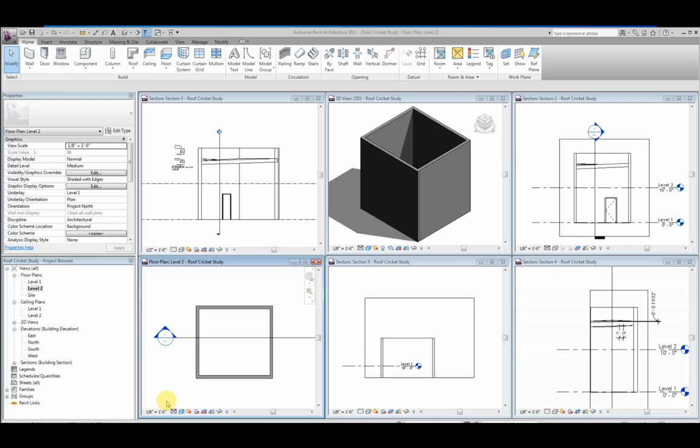This is a Revit 2011 tutorial on doing roof crickets, and I know in the past what a lot of us have done is just kind of blown by it and just drawn a graphical representation of the cricket and let it go. And so most of us just go in here and we say, okay, there's a midpoint. We're going to have a roof drain or scupper there, and let's just draw some cricket down here at some angle.

And we never really gave a thought as to what that actually induced as a valley slope across this interface between the roof and the cricket. And we know that if we have a surface that's running in this direction, relative to this roof it has no slope, and then if it's running up the slope, that's going to have whatever the roof slope is. And by code, the minimum is 1/4 inch per foot required slope on the roof.

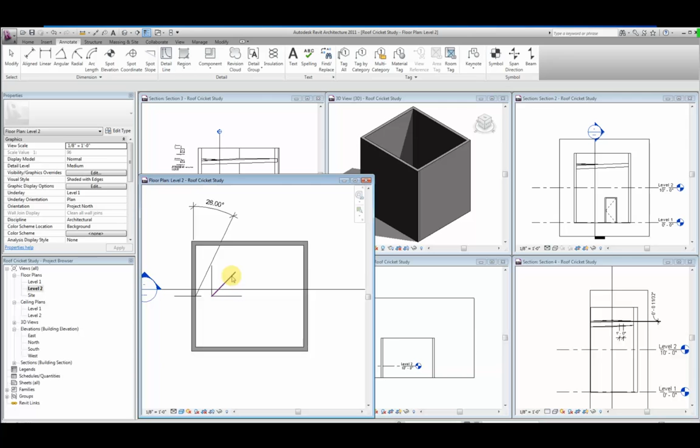I like to use 1/2 inch just to get a little more velocity of the water, to get it off the roof and prevent any kind of ponding, which actually will start to deteriorate the roof after a while. Maybe not as big a deal in Arizona where we live, because things dry up so fast, but in a wetter climate, you want to have a pretty substantial roof slope. Make sure that water gets off there. So you would think, if we come off here at a 45 degree, that this would be a 1/4 inch per foot slope, intuitively, but that's not the case.

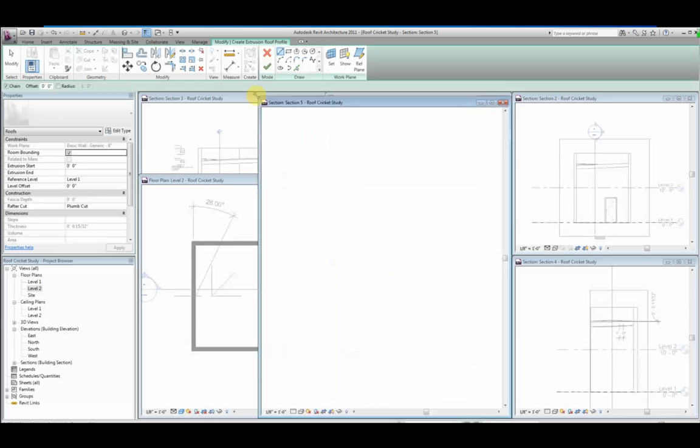So if I was going to construct a roof cricket here, at first I need to put in a roof. So why don't we go ahead and do that, just so you know how to do a roof. So we'll do a roof by extrusion, and I'll pick a plane here. Pick this plane. I'll go to section 5, and we'll just set that to level 1. So since I like to use 1/2 inch, I'm just going to come in here and go across 12. Up 6. And back down, close the triangle. Get rid of those guys.

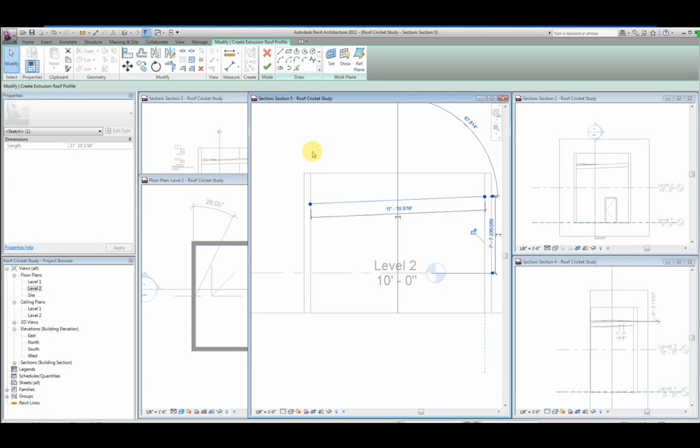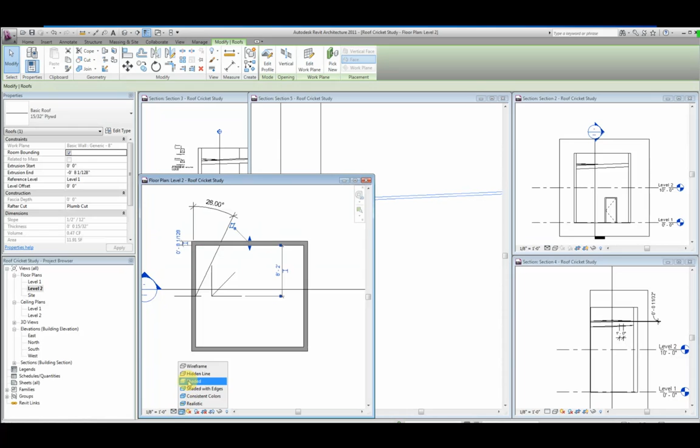Shift, drag, shoot that out there. And then we just want to check the type. So plywood is fine if you're going to use some sort of structured assembly, whatever it's going to be. So we'll just use the plywood. Say OK. Finish that off. Okay, so it gives us a little roof in there. And we need to go to level 2 here. It should be there.

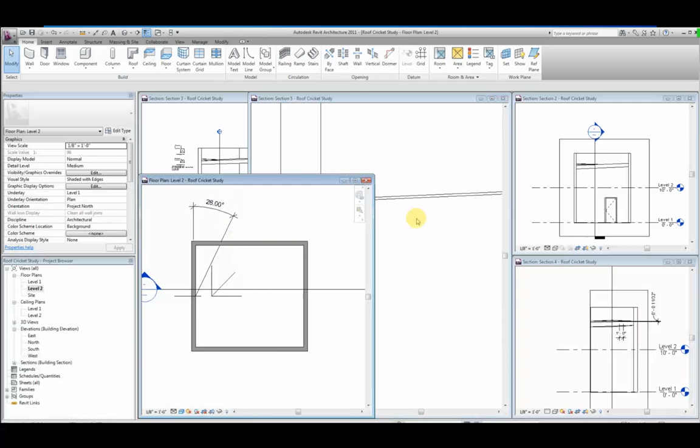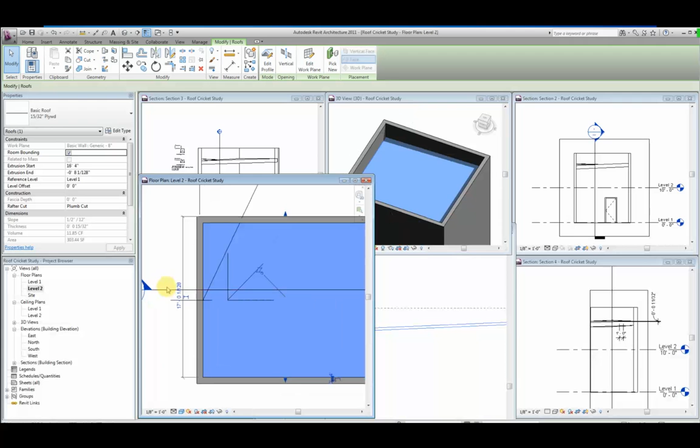Actually, just go look at this in 3D. Alright, where's my roof? Alright, so I just drag it out and get a roof in there. And then we're going to construct a quick cricket in here. We're going to do another roof. We're going to do this one by footprint.

Select a boundary line. And you'll notice that these have kind of predefined slopes to them. So we want to make sure that we turn all those off. And then we're going to use a slope arrow. We're going to use the midpoint. And then we'll go off in some direction, 90 degrees to the face here.

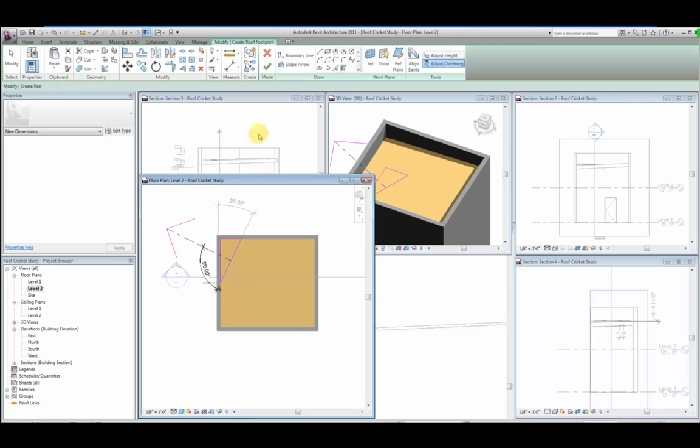Obviously it's at level 2, so let's just move it up. Alright, and you can see that this is just at some kind of weird angle here.

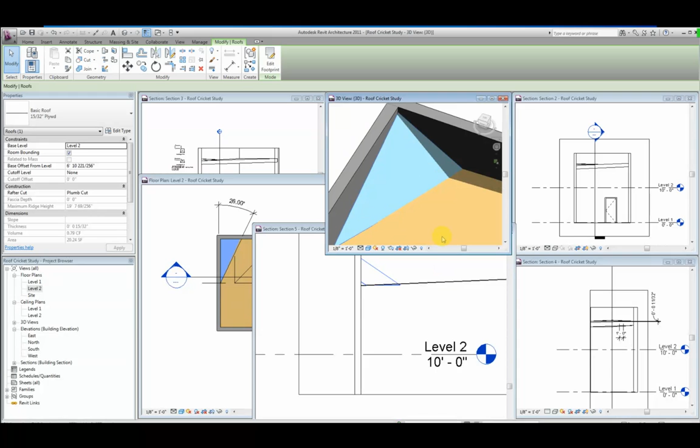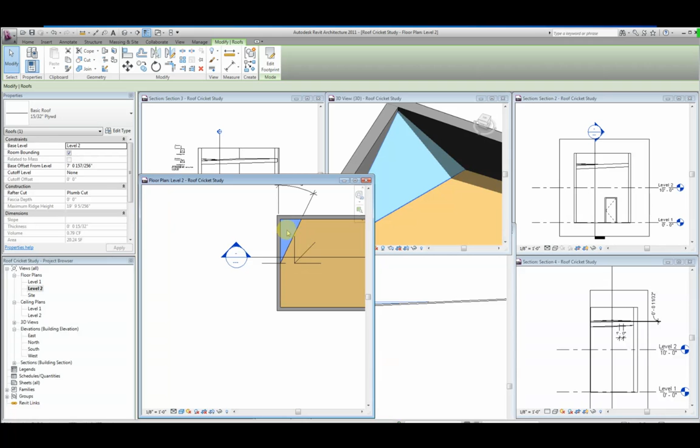And obviously it doesn't sit flush like we want it to. Alright, so what I did was I went through and I kind of looked at what angle does this really need to be to interface with the roof appropriately, and then what slope do we want to set this cricket at.

So I looked initially at just say a 45-degree angle on the cricket, and determined by looking at this section right in the valley here that it was giving us a 11/32 inch per foot valley slope, and that's using a 1/2 inch per foot roof slope. So that's what we're getting with that particular interface.

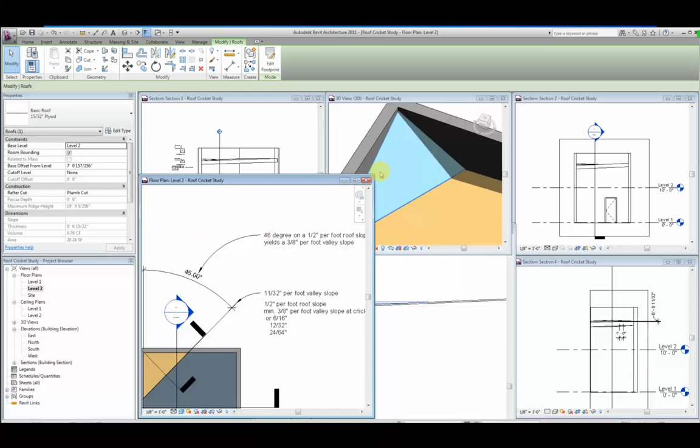And determined that if you want to get a true 3/8 inch per foot code minimum slope in the valley, this angle actually needs to be 46 degrees for a 1/2 inch per foot sloped roof. So that's the interface that you need.

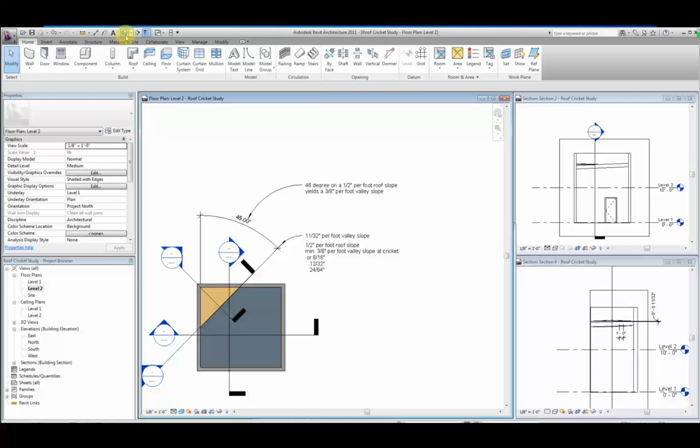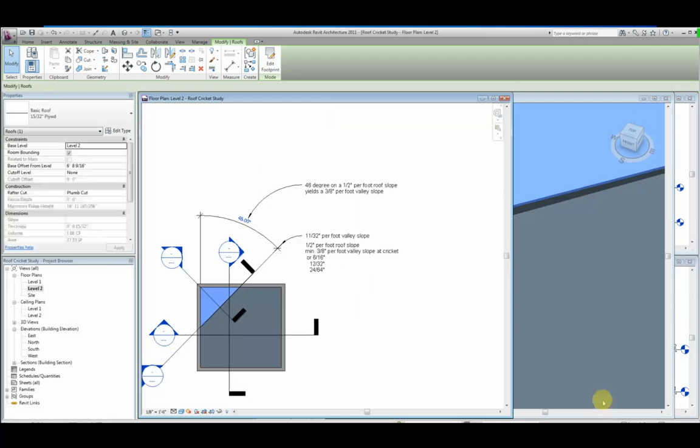All right. Then the other question that comes up, and let's just look at this in 3D real quick. So let's look at that condition. So what you'll notice here is that, so widen this out a little bit. You notice that we flush okay down here, but we don't flush down at the other end. And we need to look and see what slope we're going to make that, and how long that slope arrow needs to be.

So let's look real quick at this section here. So looking at the different slope arrow lengths, initially I started out with 12, and that was giving me a 10-inch rise. And then I said, okay, let's double it to 24. So we're getting a 5-inch rise, so it's halving as you go down. And took it on down to like 96-foot length on the slope arrow.

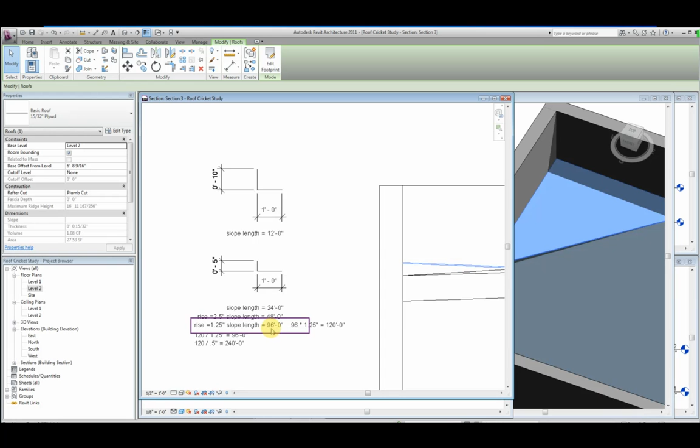And let's see, I don't know if you can see that. Just edit the footprint, and you can see the slope arrow. In this case right now, this one's set to 240. I'll show you why.

So what I determined was that if you just run the math, you take 96 feet times 1.25, which is the rise that you wind up with in that particular setting of 96 foot, that equals 120 feet. So if we run the math backwards and we say, okay, 120 foot divided by 1.25, that's 96 feet. So if we want a 1/2 inch per foot slope, we'll take 120 divided by 0.5 of an inch, and we'll determine that the slope arrow needs to be 240 feet long.

So that's your equation there. If you're trying to determine the slope on a roof, just take 120 divided by the slope you want, and you'll know how long you need the slope arrow to be.

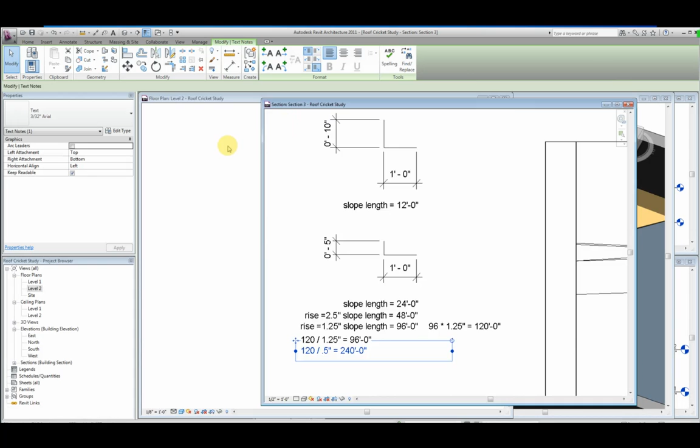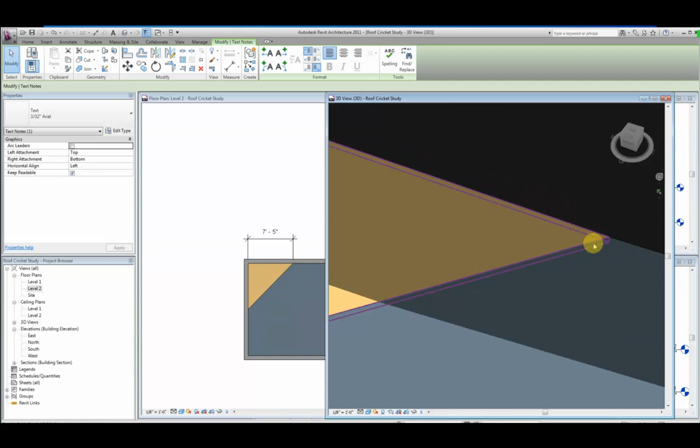All right, now to deal with that issue of the cricket kind of sticking up here, we need to actually rotate that slope arrow a little bit. So this one actually has been corrected. So you can see that this one is flushing nicely at the low end and the top end, and we'll just look and see what that rotation is. And here you can see it's 45 degrees from the high end, and it's 135 from the low end, and that will let that cricket sit in there flush. Again, that's for a 1/2 inch per foot sloped roof.

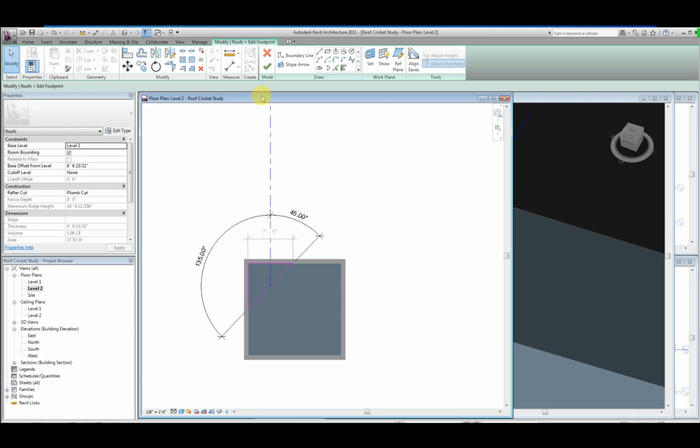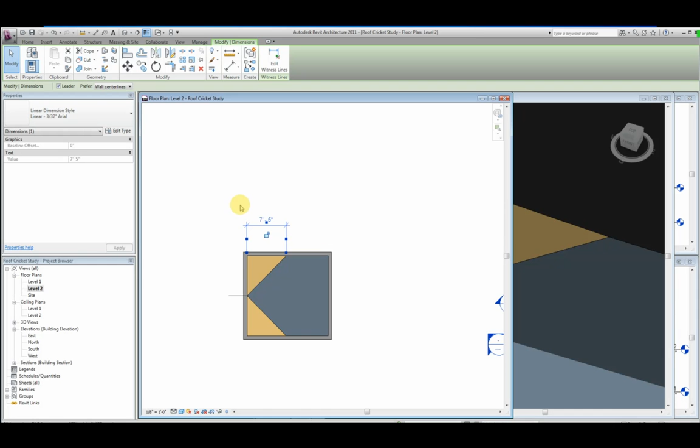All right, and then once you have your first cricket established, it's pretty easy to just mirror across, and now you know that your crickets are constructed properly. You can put control dimensions on there to make sure that they actually build them in the field properly, and that you're maintaining that code minimum 1/4 inch per foot slope throughout the roof, even in your valley conditions. And that's pretty much how you deal with crickets in Revit.